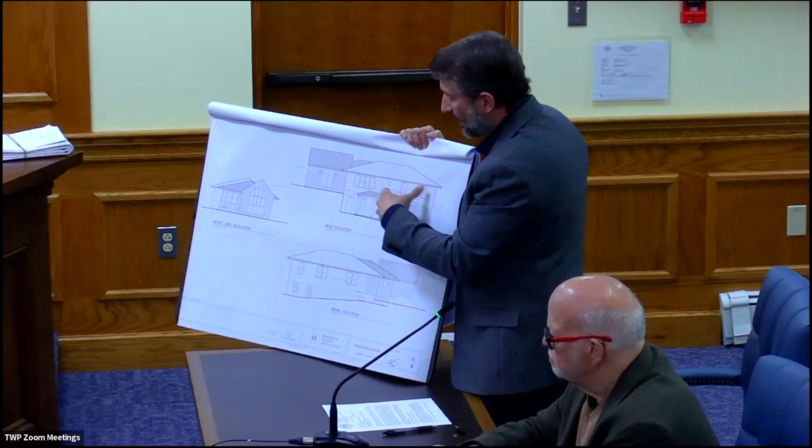There's a proposed door opening where a window was, and then this entry porch runs with the style and character of the house, with the hipped roof and materials - either standing seam or copper metal roof - and columns that are detailed and consistent with the character and age of the house. So it looks like an original portion of the house as opposed to something added onto it.

And then the proposed addition, when you're looking from, let's call it the front, it doesn't really present as a front, and you can't see it from the street because of how high it is above Route 24, and it's also concealed within trees - it's heavily wooded along that area.

So we have the front, which somewhat appears like the back, and then the existing porch element, which is being infilled - the first portion of the addition, which is the office. And then we've created a piece here with a slightly differing roofline to look a bit more like an accessory structure, not wanting to change the scale of the building. We're trying to create something consistent with that smaller scale and lower roof lines. So we gave this its own separate roofline piece, but the same shingled, painted shingle material, asphalt roofing shingles, consistent with and blending into the character of the existing house.

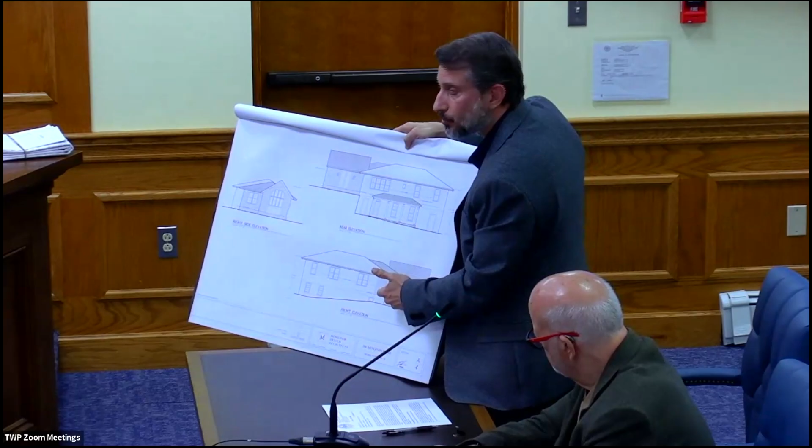Okay, thank you. There's a series of photographs in your packet - could you go over those and explain them to us?

And I'm not going to mark these since they're part of the package. Right, okay.

The first image is essentially the front side of the house. As the grade comes up, it's really kind of a single story appearance of house, and this level of ground sits well over a story above Route 24 down below.

The second image is stepping further back, so you see that whole front face of the house as well as the left side. That left side is currently where the grade drops down, and you see some carriage house doors there. This is an old carriage house, and that is the garage entrance to the house. There are no proposed changes anywhere along this front left corner or along the left side of the house.

The third image is a head-on, full-on view of that left side with the carriage doors going into the garage down below.

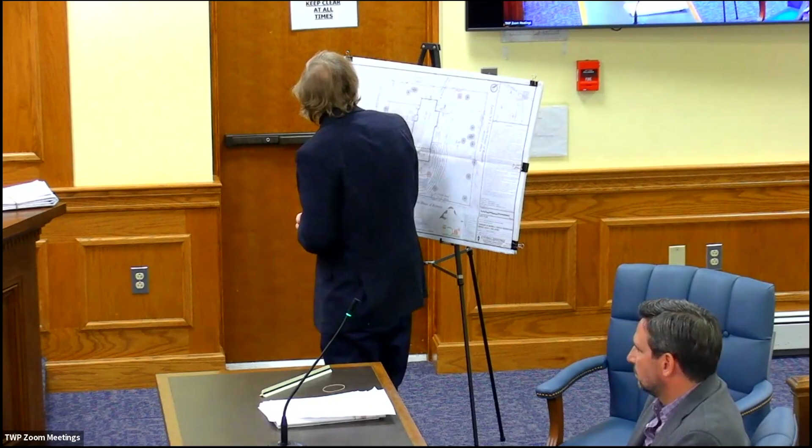The height of the building will conform where 35 feet is permitted; we're at 33 and a half. With impervious coverage allowed at 35%, we're at 21.71%. Building coverage at 15%, we're at 12.05%, even though the lot technically is undersized in this zone - 35,000 square feet is required. The pre-existing condition, we're at 26,450 square feet. We are asking for 3 variances as enumerated on the agenda.

The pre-existing side yard variance, on the western side of the property, will not change. It exists at 18.96 feet, and that will remain. Combined variance, side yard north, east and west - 75 feet is required. We'll have 66.67 feet with the addition of the garage on the easterly side. And there's a pre-existing front yard setback where 75 feet is required. The existing house is at 52.81 feet, and that will not change.

I should mention the property is surrounded by the lands of Loyola House of Retreats, both on the easterly side and on the northerly side as well. My feeling is that these variances could be granted, being that it is mostly open space to the north and to the east.

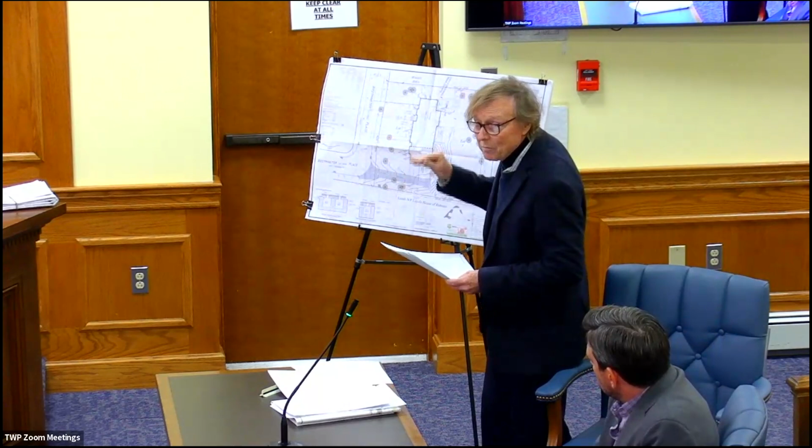We do have a slight increase in drainage. Let me say briefly that the increase is small because presently the lot slopes from the street towards the rear, dropping about 18 feet from south to north. Presently the driveway is on the easterly side and it wraps around the rear of the house and garages below. With this addition and garage placed on the side, the garage will be about half a story below the first floor, which will be much more accessible for future residents. The driveway that wrapped around will be removed, so there's less lot coverage there, though we're adding some lot coverage on the side to access the new garage. All in all, the increase is rather slight in runoff.

24 cubic feet on the 10-minute, 25-year storm, and 72 cubic feet on the 60-minute, 25-year storm. We've addressed that with the addition of 2 dry wells in the rear of the house to capture runoff from the roof, and we've also added a dry well at the base of the driveway to capture runoff coming down towards the back of the property. We have a total capacity of 635 cubic feet for the seepage pits for the home and 317 cubic feet for the seepage pit for the driveway. They will more than cover any increase in runoff - as I said, it's only about 72 cubic feet increase - so we've more than captured that with the installation of these dry wells.

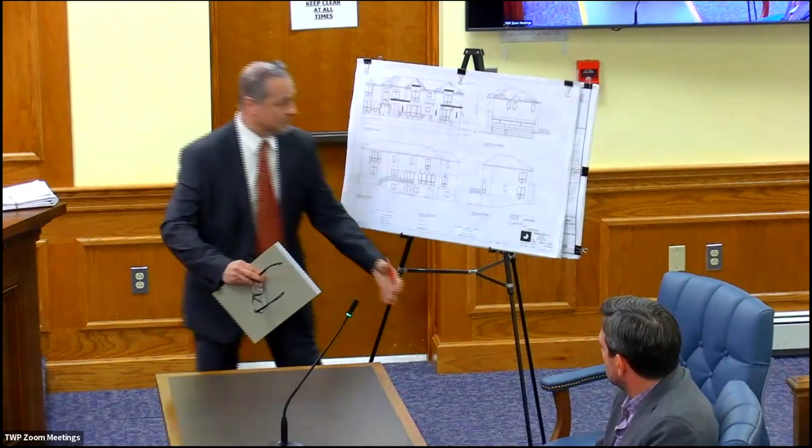The existing property at 9 Westminster is unique in several ways. It's currently a ranch, one story, with a screened-in porch on the right side, and the property is pretty much flat in front. It drops to the side, to the right, and in the back. The garages are accessed by a driveway that goes from Westminster around the property and into the back underneath the screened-in porch and the existing basement.

Our proposal is to remove the roof and remove that screened-in porch. It's really a ranch that's in need of repair. So the main principal structure we want to keep, and we want to expand up and out.

Besides the uniqueness of the property, it's surrounded by one single-family house to the left, and to the rear and right side it's the temple and I think the Loyola Retreat Center. So it's open space, other than the single-family house to the left, where our engineer said the existing side yard is 18.96. There's a buffer between our property that we want to keep, except that it will be cleaned up with this proposal. So that was our first variance that we're asking for.

The existing left wall from the ranch to the property is 18.96.

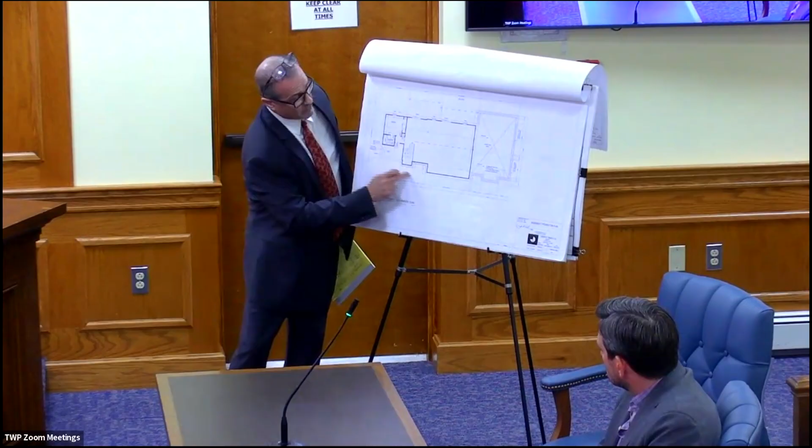The other variance that we're asking for is the front yard setback, which is existing. I believe that number was 55.43. Our proposal will not increase that at all. In fact, any additions we do, especially to the garage, we're going to set back 3.5 feet, so that 55.43 still stays as a non-conforming setback.

Then the other variance we're asking for is the total side yards. Again, this is a non-conforming width of property, so where 75 feet is required for the total side, we're at 66.67. That's because we left the right side of the structure, removed the open porch, and added a 3-car side load garage, and that's what kind of triggered the total side yards. That's the third variance.

However, we felt that, again, because of the shape of the road and because this is located in open space, it really has zero effect on any neighbors or anyone in the public. So basically an open space—we are proposing a set of stairs to an open space with a bedroom, a bathroom, and a utility room. This is currently a walkout basement and will remain a walkout basement.

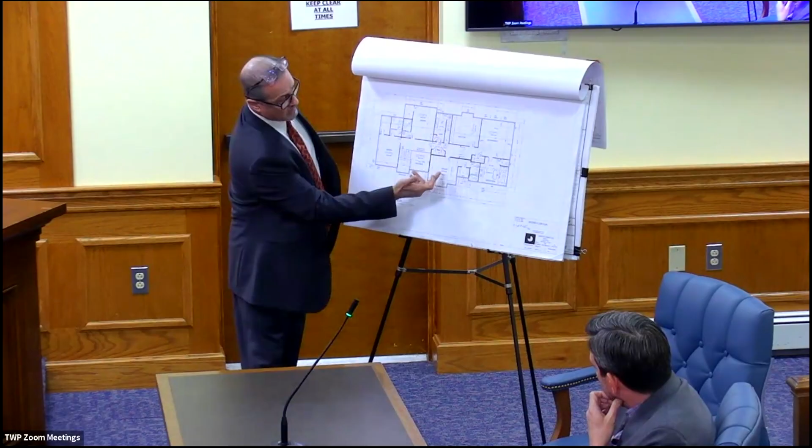We continue down to a hallway. We have a laundry room, another bedroom with a closet and a bathroom. And then we have the entire master suite, which is a walk-in closet, master bedroom, and master bath. So all in all, on this floor, it's 4 bedrooms. We have a bedroom in the basement, so it would be a 5-bedroom house.

I'll move on to sheet A1, which is the views of the house. So we got the front elevation. Again, we're adding a second floor to the existing structure and the addition of the garage to the right side. We proposed a stucco house with flat windows, kind of more of a modern feel to it.

And I just want to say, when we worked on these plans with Mr. David, we realized that we're asking for a variance, especially on the left side. This is where the minimal effect is as far as the addition. We didn't go out on this side of the house. We also dropped the roof down lower, so we have less of an effect on the neighbor to the left of us.

As far as the 2-story structure, we meet the height. From the average grade, we're at 33.55 feet, where 35 feet is required. So we felt that this fits within the guidelines of the zoning ordinance, even though we're asking for 3 variances. Again, one side yard, total side yards, and the front yard.

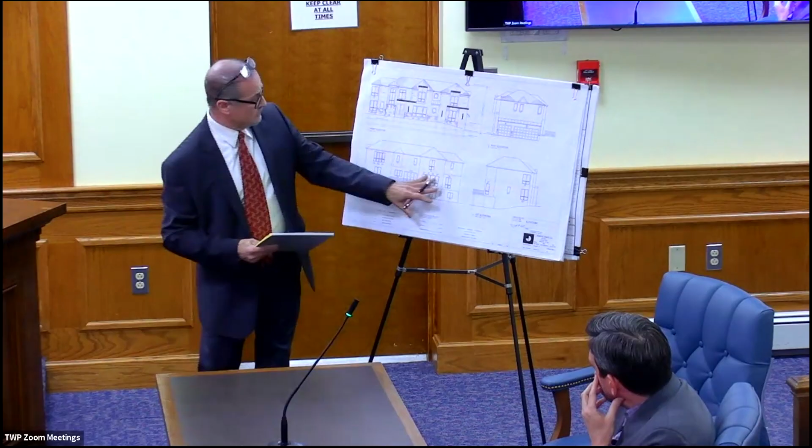So you got the elevation to the rear. Again, it'll be stucco, that's a walkout basement with windows looking out to the backyard. With this proposal, we'll have more open space in the rear yard where the only neighbor, even though it's buffered, originally stored cars and driveway in the backyard. We're going to eliminate that, and we'll have the cars all the way toward the open space on the right.

So that would be it. Again, we're asking for 3 variances, 2 of which are existing, and we're not making that any worse.

Do you also have to apply to the town of Morristown on this? I don't think we do. Well, we applied for our notice, but when I called and asked about any variances, they said no, we were dealing specifically here. So you don't have to go to the Morristown Board to get any approval? No. I think before the town issues a permit, we'll need a letter from Morristown confirming that, because otherwise I would think you have to do that. Oh, really? Yeah.

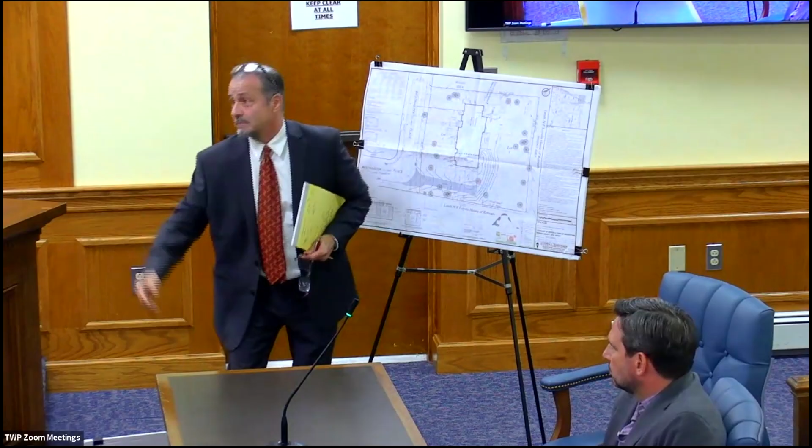Do you know what their zone is on the other side of the line? I'm sorry, do you know what their setbacks are on the other side of the line? I don't, because when they told us they don't really have anything to review, we kind of just came straight here.

Did you submit the plans to Morristown or just call them? I called them personally and they said they don't... I'm just wondering if they'd seen the plans, they might have answered differently because they didn't know exactly where you were putting things. We could send it to them, right?

I thought the same thing, I thought we'd have to go to both planning boards, just because the majority of the property is there. Right, the majority of where the improvement is gonna be. Correct. We could call them and submit a plan and see what they say. It's gonna be we just need a condition upon a letter. They just need to know that, okay? Absolutely, yes.

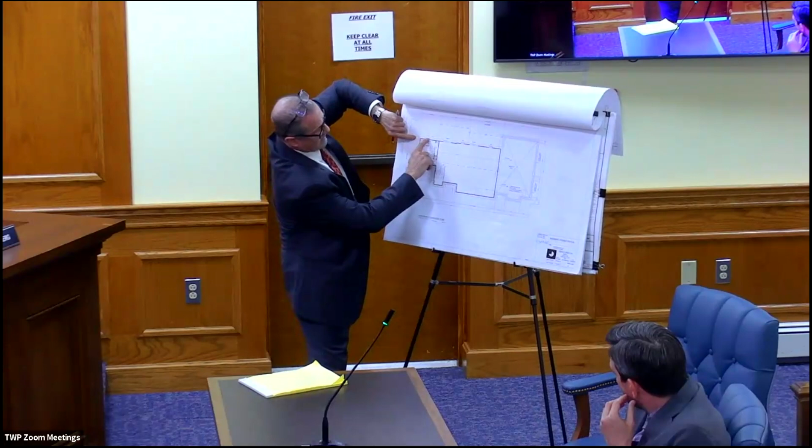Okay, board members, any questions? Just quick clarification, because it looks to me like the existing rear wall comes from where the bedroom is proposed in the basement, straight over. So this is the corner of the existing basement. Right, it's straight over. We do have overhangs in the back holding up the structure.

So they start about 30 over. For the addition, the first floor will have a separate exterior wall that will run parallel to this wall. Correct. So this is the first floor, this is the corner of the existing. If I follow the existing, it's there, but we extended the kitchen and family room further back, about 5 feet further back. So you'll cantilever over the existing wall? Over with supports, yes.

And again, this extension meets the side yard and total side yard. So really, the biggest difference in the volume of the house is the height. You're not going back very far. Correct, you have the garage and nothing on the left side. For the garage, even though we're out 24 feet, there's a 10-foot sunroom that has a garage under it. We're taking that out, so we're another 14 feet to the right. All right, thank you.

But even when you're extending that out, it's just the combined side yard you need the variance for, not the single side for that part of the house. Correct, because you're at 49, what's 30 is your minimum? The side yard, yes, 30 is required. We're just under 19 on the other side, you're at 49.42, where 30 is required. Correct. So we do have the 30, but we don't have the combined of 75. And also we're a non-conforming width lot.

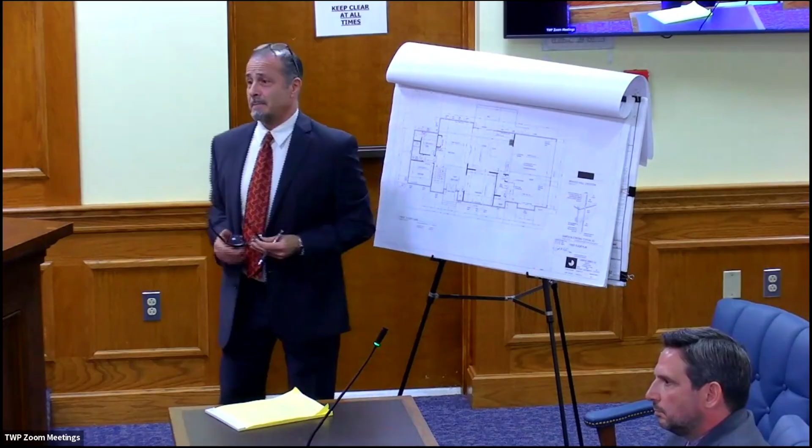Any other questions from board members? Any members of the public with any questions of this witness? Seeing none, hearing none, close the public portion.

Any further comments? No, I think our proposal really has no negative impact to any public. We're keeping the addition to the left as modest as possible. We are going to keep buffers, we're going to clean it up, the property gets cleaned up. I think it's a positive for the street and the streetscape.

Your real problem started with the house being so close to the other side yard. Other side and front also. Right, so that triggered all these variances. Correct. So I would be in favor of this, especially given the fact that we have Loyola and the temple being your neighbors, and there's no plans to develop anywhere near that. And they're so far away. Right, and there's so much buffering. I'd also make it conditioned on a letter or approval from Morristown.

Any other comments? If not, I'll entertain a... I think my contractor is trying to say that we're going to need a letter from Morristown. That's fine, you're just gonna have to get it. We're just gonna have to get it.

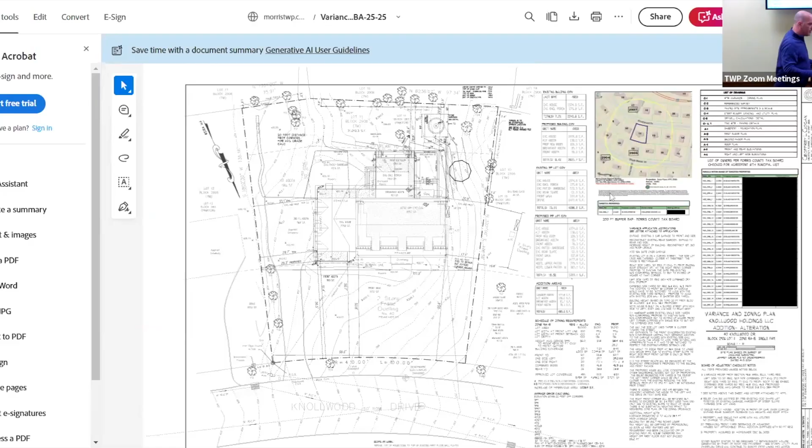Hello, Brian Mileo, 16 Canterbury Way. Would you spell your last name, please? M-I-L-E-O. Just a question for the owner - you mentioned you're moving out of Livingston because your house is too small? No, it's too big. Can you tell us the square footage of your home in Livingston? Close to 5,000 square feet. And will the architect reveal the square footage of the new house being renovated? When we talk to the architect.

Good evening, members of the board. Timothy Dixon at 14 Kissel Lane. You mentioned that your children are older and recently were married. My daughter got married. Who else would be living in the house with you? Just my wife and I. Thank you.

My name is Frank Zupa. I live at 23 Canterbury Way, a couple of blocks away from this house. And you said you needed more space. No, I said I wanted a spacious feeling house with higher ceilings. But the house you're proposing has in excess of 5,000 square feet. No it doesn't, I've looked at the plans. Your architect can answer that question when the time comes.

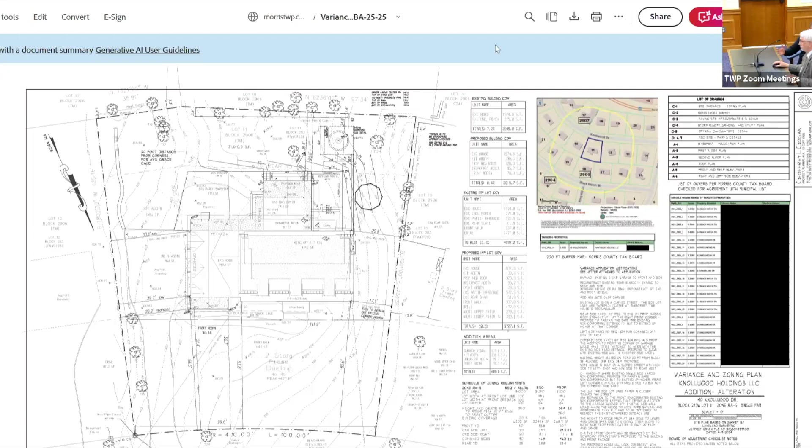But with regard to why do you need 4 bedrooms with locks and separate bathrooms? That has nothing to do with what you said. Well, when my family comes and stays with me, I like them to be comfortable. Each one should have their own bathroom and a locked door. What's wrong with that? It's about comfort and privacy. And the second kitchen is called the baker's kitchen? Well, I'm an amateur baker. One of my hobbies is I like to bake sourdough bread for my friends and family - I give it away.

Well, I'll reserve the other questions for your other testimony. Thank you. Any other members of the public with questions for the applicant? Hearing none, seeing none, close the public portion.

We introduce the architect for the proposed renovation of the house, Mr. Jeffrey Gogan. Thank you. I feel a little out of place sitting down, but I hope that's okay. I'm going to look at my screen, which should exactly agree with what's on the large display. Before we do that, can we go over credentials for the board please? Yes.

Jeffrey Gogan, architect, at 35 Pine Street in Morristown. I've been in Morristown working as an architect and planner since 1984. I graduated NJIT in 1978, became licensed in 1983, and I've been testifying before many boards in this area and North Jersey, including this board, for many years.

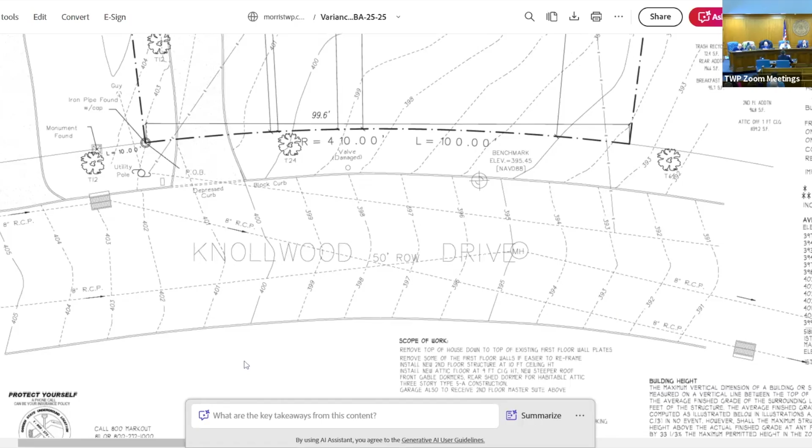Joe, let me ask you - I'm not sure if you had a chance to look at the square footage of the lot itself? Yes, I was trying to pull up the deed. I was able to find tax records through njpropertyfacts.com, a search of last year's tax records that shows the land description at 0.362 acres, which would be just under 16,000 square feet in size.

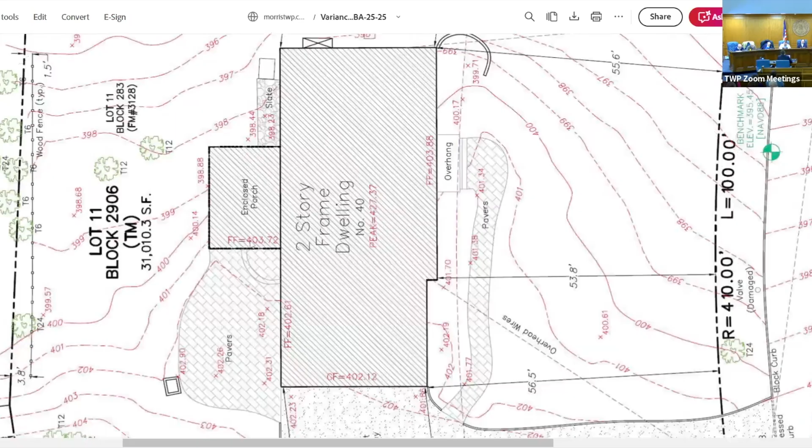It appears there's likely a typo on the Lakeland survey, sheet 2 of the set, that indicates 31,000 square feet for the lot, block 2906, lot 11. It's roughly 130 by 135 in dimensions. So what's shown on the zoning map would appear to be incorrect, because it's based off a survey carrying, I believe, a typo on the plan. I'm looking to pull the deed booking page to see the description in title, to see if that gives a square footage. I'll do that and follow back.

Okay, so we're going to come back to that thought, because it impacts other things like coverage, right?

This is the first I've heard of that. It's interesting, but I did rely on that survey. I wasn't aware there might be a mistake on it, and I was just looking to see if maybe I picked the area of the lot myself, but I'm not seeing it. No, it says 31,000 on the survey. Yeah, so I think I relied on that.

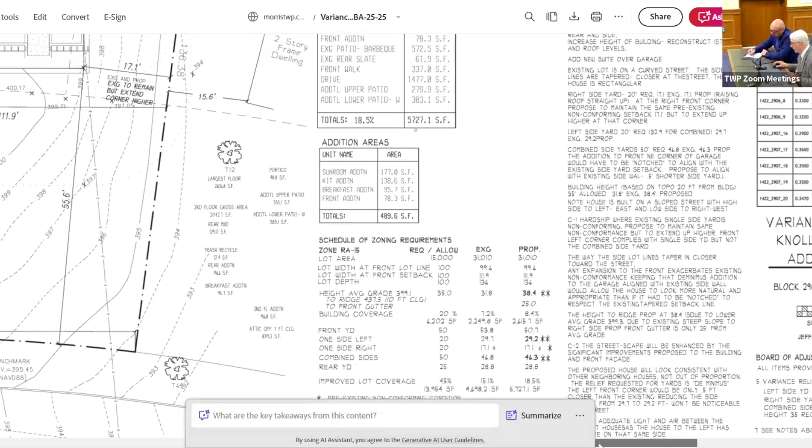Okay, so should I keep going here? Yeah, we'll come back to that issue, I think. I'll have it in a second. Yeah, go ahead.

Okay, so on the cover sheet I have my coverage calculations, and below that the schedule of zoning requirements, where I highlighted the height of 38.4, where 35 is permitted, and the one side on the left at 29.2, where we have 29.7, but 20 is required for a single side yard. But more was required because of the shortage on the right side for the combined side yard, so for combined sides it's required to have 50. Typically for a house, if you have 20 on one side, you'd have to have 30 on the other side. We are at 46.8 right now, and we will be at 46.3 feet.

Okay, so those are the variances. Let me back up here, and I'm just going to skip over, this is the survey Joseph was just talking about, and that's the area he was referring to on the surveyor, which we do rely on.

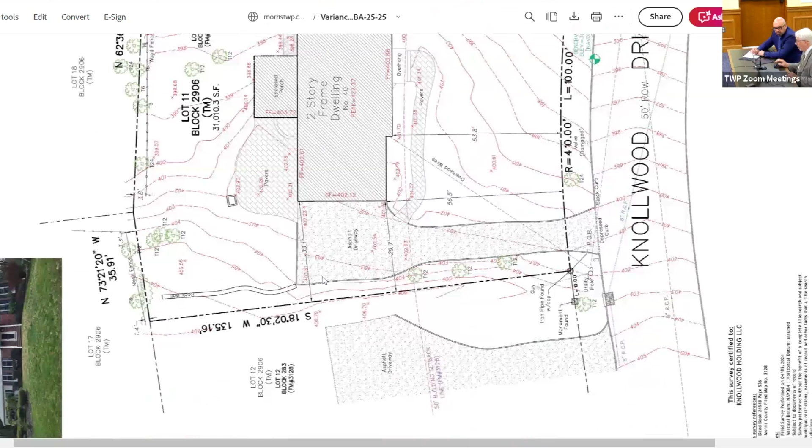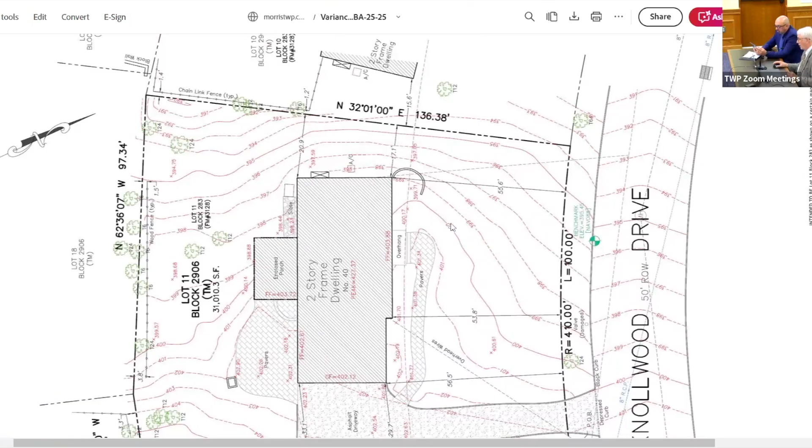You can see on the survey, and I have it on my site plan too, that the slope is quite severe with the topographic lines. There's a hill going down in this direction, and when we calculated the height of the building, we had to measure the topography all the way over in this area off of our site because it's 20 feet from the footprint of the house. That brought our average grade lower and is one of the reasons we triggered a variance.

These sheets I'm going to scroll through are for the paving and hardscape plan, which really just include a stormwater system, which I'll talk about. We are proposing a good-sized dry well to pick up more than the required amount of water from the runoff coming off the roof.

This will all be reviewed by the township engineer as part of the process as soon as the variance is complete, but they have this already ready to be reviewed. Essentially, it's just keeping most of the existing grading with a few changes in the rear around the rear addition.

The next sheet is really more about the storm runoff. It shows the proposed perimeter drains leading from the roof leaders over to the dry well, and they'll review all of that, of course.

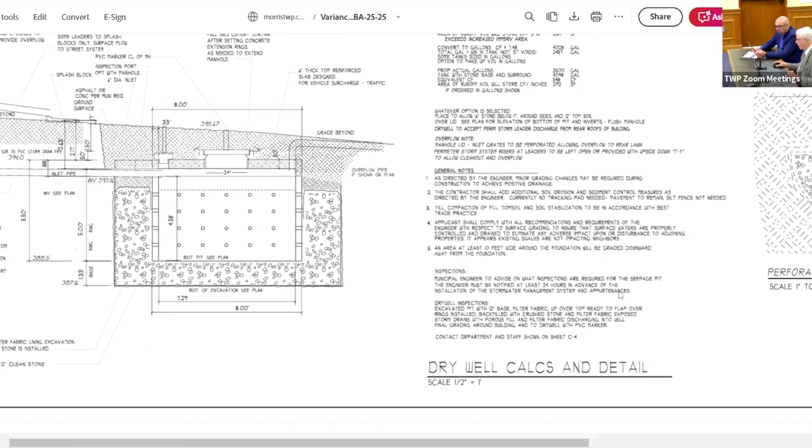Then there are some dry well details and calculations for the volume, and some more details of the site, including any pavers or patio work, some plantings, and some trenching.

Also, this is the first architectural plan, the basement or foundation plan. So I'll just back out here again.

So the existing basement is this rectangle right here. It has a little recreation room, a little closet area, a rear unfinished area with mechanical equipment, and some basement windows. The left side of the drawing is all slab on grade where the garage is.

This rear portion here, if you can see, let me zoom in a little bit. This dotted line I'm pointing to is where there's an existing sunroom, we called it, built over a deck. It was built on top of a deck, which is not ideal, obviously. It only had 3 sonotubes under it.

So we decided to rebuild it, and while we were doing that, we decided to expand it a little bit to the right and to the rear to create a nicer, more usable family room. But it was all respecting all the setbacks.

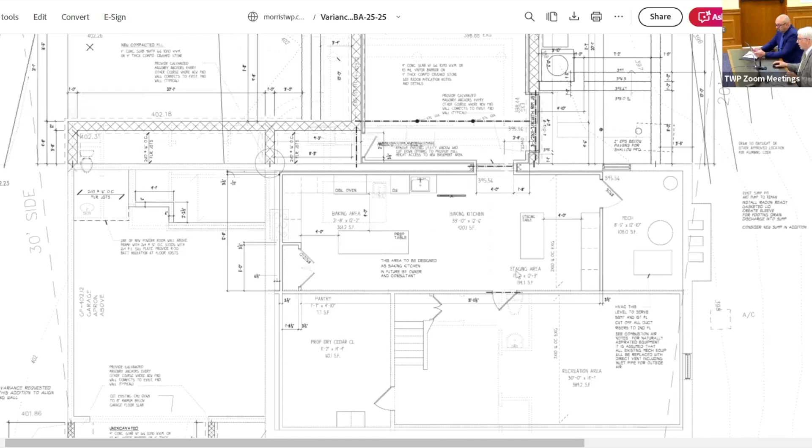The ceiling height is quite low in this basement, so we are also proposing to step down into this larger room, which will become a more functional, useful room with a better, more normal ceiling height, probably closer to 8 feet, still a little under 8 feet.

There's a walkout sliding door proposed right here to a lower patio, which will then step up a little bit and have a little area for barbecuing or a smoker, some outdoor barbecue type equipment.

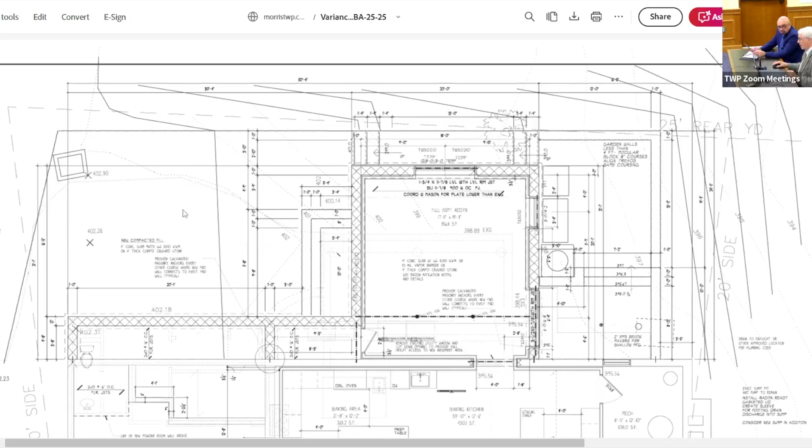Then the patio will step up along the back of the addition to an existing patio, which is in the upper left side of the drawing. That is being expanded very slightly just to align with this walkway. This is the line proposed for the patio right here.

You can see some of the regrading, just filling a little bit here and creating a very low retaining wall here to cut into there to allow this walkout basement. So right now it's not a walkout.

I'll go down to the first floor. Back out of here a second again, and here you can see the front bump out with the pedestrian door and a little bit of area for bins for recycling and such. There's an existing portico on the front of the house, which is going to remain.

We're just going to redo the columns and the detailing of it. And then here are the 2 garages. They're staying. We're proposing this mudroom on the back with a toilet and sink, a little powder room, some closets and a pantry, and a little area with a back door and a door from the garage. Then you walk through a hallway over to the kitchen, which is kind of an open breakfast room, kitchen area.

And then there's a door to this back family area. We still have this existing family room with a fireplace, pretty much as it is. The dining room is still there as it is, and the living room is there, but we're making it a little smaller to be able to add a front powder room and a hall closet.

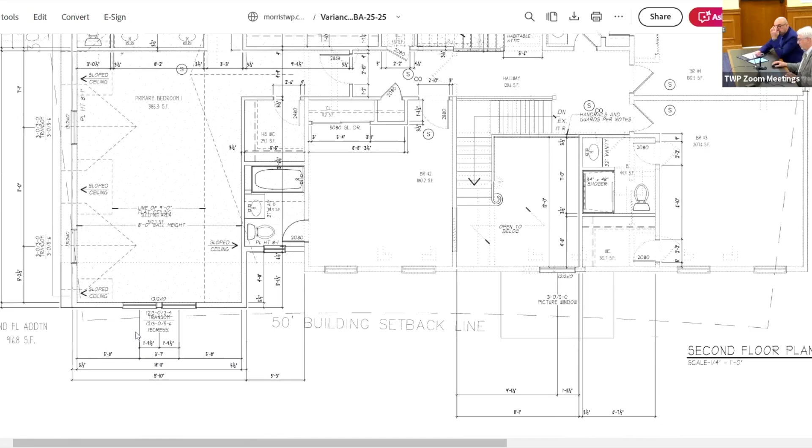So this whole section here is a new bump out over the garage, this whole section. And it goes over the bump out on the front, and it goes over the bump out on the back.

So basically it has a couple of walk-in closets and a decent master bath with 2 lavatories, a private toilet, a tub and a shower, and then a sleeping room. There's another little bathroom off of this bedroom.

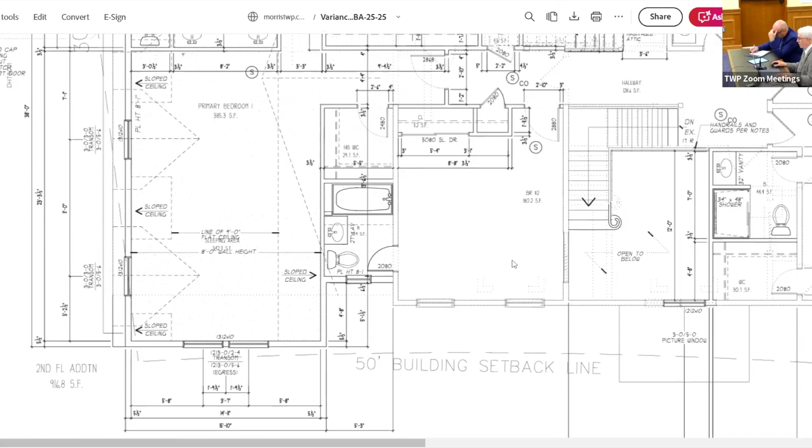In this hallway, normally you might see a pull-down stair to the attic. But we decided to try to make the most of the attic with what we call a habitable attic, which means we raise the pitch of the roof and put a compliant everyday stair, not a pull-down stair, up to the attic. So I'm going to scroll down to the attic plan.

So you can walk up that stair to kind of like a bonus room where the grandkids could crash if they're visiting. It is a legal sleeping area if somebody wanted to sleep up there, although it isn't a bedroom. Right now we don't even have a door to it. We could put a door at the bottom of the stairs, but we have an egress window. We have dormers in the front.

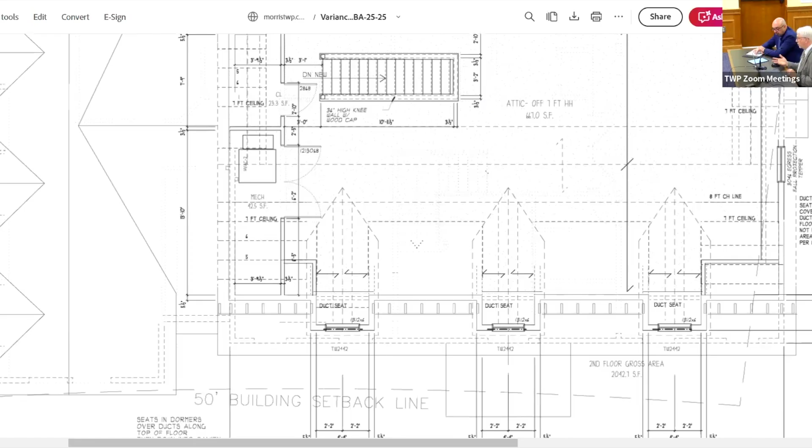So we wanted to raise the pitch to get, I'll show you the elevation, a more traditional, steeper roof over the dormers. And we're going to put a new HVAC system up there for the second floor and the attic. But basically, you come up the stair and there's just an open dormitory feeling for an office or for people who need to work at home.

And need a quiet area where the kids and the pets aren't running around. I'm sure everybody after COVID has experienced that problem when you want a little bit of extra elbow room, a little private area where you can either have an office or a play area, or another little section for whatever.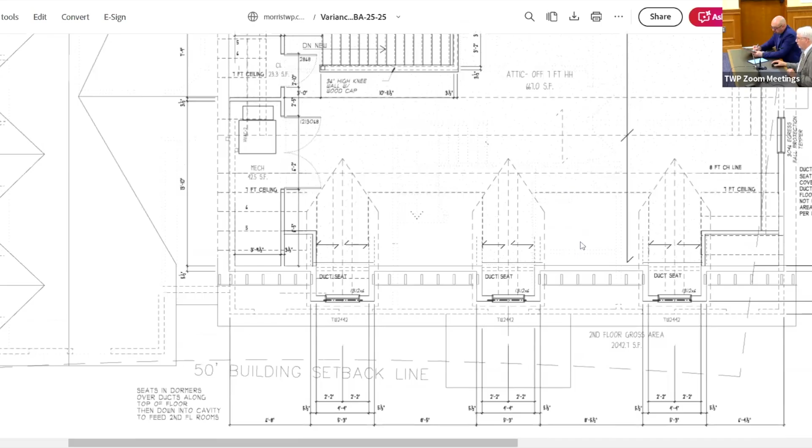So that's called a habitable attic. It's limited by the square footage of the second floor. The rule is that any area with more than 7 feet of headroom can't exceed 33% of the second floor area. That's a code issue, and one way to think of it is like a mezzanine of the second floor. It's technically considered part of the second floor under the International Residential Code, but it is an upper level of the second floor. It's called a habitable attic.

So now I'll just look at the elevations. I have to.

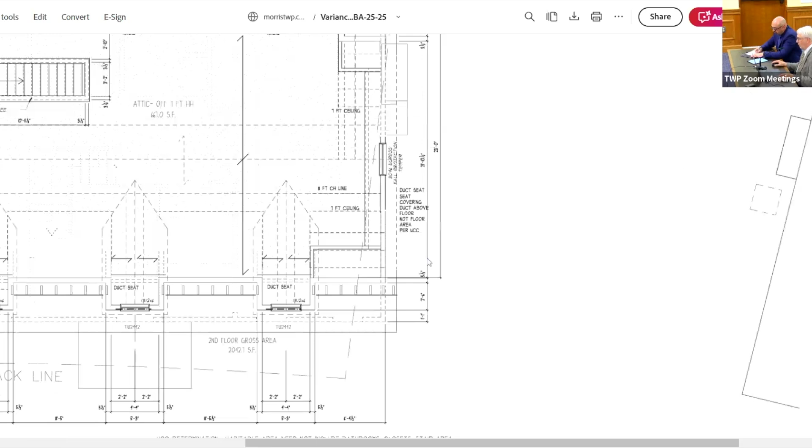So before you jump off the attic, what's the ceiling height again in the attic? Let me see if I can show you.

The area that you count for that 33% rule is any area that's 7 feet or higher. So you see this dashed line right here goes around like this - this is the 7-foot line. It follows the dormer around because it's partially in the dormer.

It's really hard to see your cursor, but is that the one that's kind of in the middle up there? Yeah, for example, right there, you see that 7-foot ceiling? That dashed line can be used all the way around, you'll see that's where the 7-foot line is. I'll just go slow here and you can see it.

So basically you see the same 7-foot ceiling line right here. These parts are sloped. You've probably seen these attics with dormers, where you have a sloped ceiling going down next to the dormer, and that's what you'd see here, as well as on the backside.

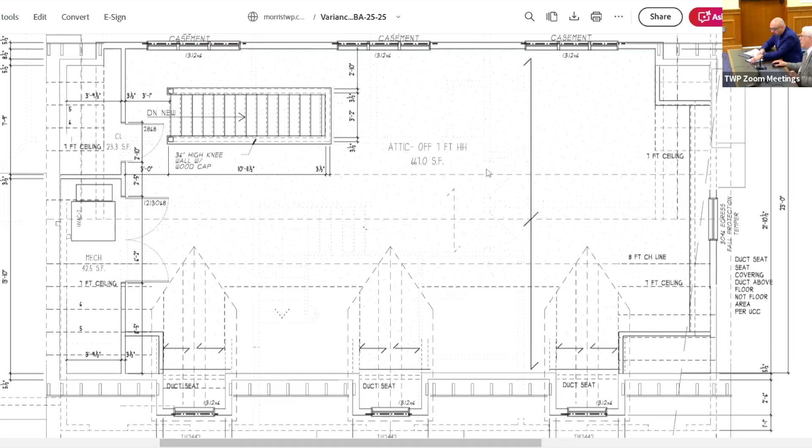And part of it, this rear area, is a shed dormer facing the rear yard, and that does have a 7-foot ceiling.

Okay, the front elevation.

Actually, I think I'll go to the left side first, because here you can see where the existing roof is. This dashed line, if you can see my cursor, is where the existing roof line is. And so the proposed main roof, which is beyond this garage roof, is this line here that goes up, and then you see it appear up here.

So that's the main triangle of the roof over that dormer, over that attic I just talked about. This is the rear shed dormer over that attic, and these are the front gable dormers in front of the attic. And then we have 3 similar dormers along the left side for the master suite with a cathedral ceiling, the 2 existing garage doors, and the pedestrian door we're proposing.

So again, this is all an addition right here, this whole portion in front of the existing garages. And then this is that 4-foot 8-inch addition in the rear, this whole section. And then this is the sunroom beyond - again, that was just to here before, and this was the roof, the top of the roof.

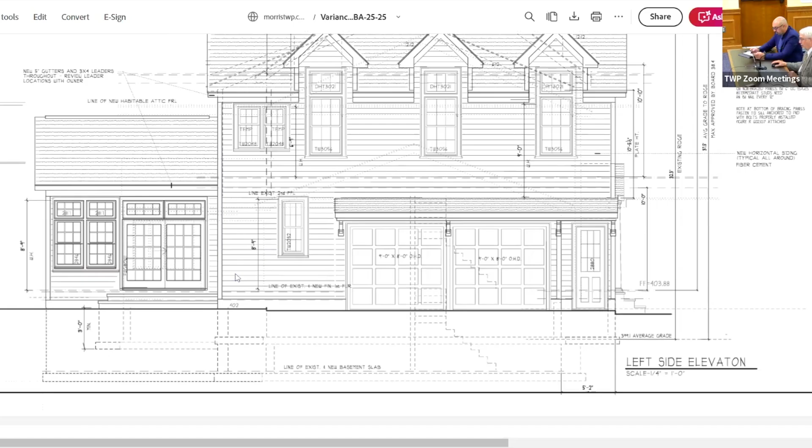So it's gotten larger in both directions and the roof got steeper. So now I'll go back to the front.

You can see here, basically the window pattern is the same, although these are taller windows because they're proposing to raise this second floor up to the 10-foot ceiling and the 9-foot ceiling on the second floor. So all the windows are nicer, taller, more traditional with transoms.

The same thing with the portico, taller, slender columns with a new roof over it. That's the existing chimney on the right that you see beyond in that family room area in the back right corner. And then these are the 3 dormers in the front with the steeper roof, which wouldn't be possible if the roof was kept at a lower level.

And then we have this similar gable over the garage with a connecting roof here, and these are those dormers on the side, the left side. So those 3 dormers at the uppermost level, that's serving the attic? Yes. Did you consider just reducing the height of the attic so that you could comply with the height requirement?

We were close to that before, but really what drives it is pushing the second floor up 2 feet. Right now it's at an 8-foot ceiling, becoming a 10-foot ceiling, and another foot for the second floor. So that's 3 feet higher that the attic floor would have to go up to get those 2 floors where they were hoping to get them.

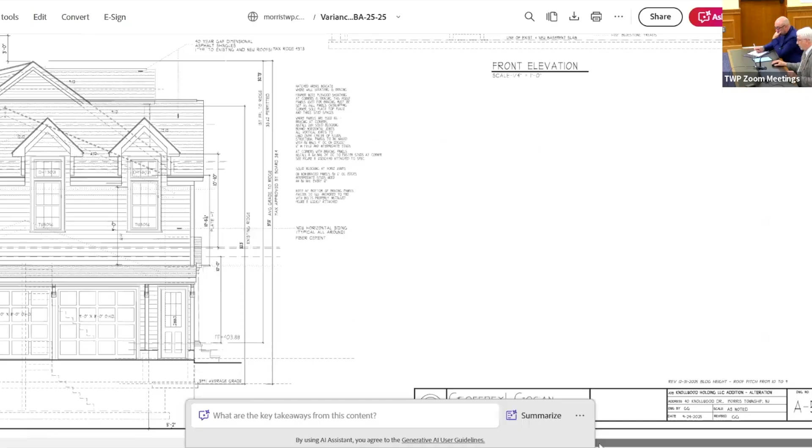I'm sorry, let me get back over here. Could you explain the 9 and 12 for those — what you mean by a 12 roof or a 9 roof?

Yes, if I can gesture, a 45-degree angle would be 12 feet horizontally and 12 feet vertically, so that would be a 12-on-12 roof. But if you drop it down to a 9-on-12, it's only 9 feet vertically to 12 feet horizontally. So it's like a right triangle. That's how we call it, a 9-pitch or 8-pitch or 7-pitch, and it drops like that. Thank you.

So I just go back to this existing pattern here, and you can see vaguely right here where the gutter line is, where the soffit is right now, right there. So that soffit has to go up 3 feet, and then if we did that and tried to comply with 35, it would be a very low pitch roof.

So really the right thing to do is to raise the pitch of the roof and raise the whole roof up. It'd be a low-pitch roof if you wanted to maintain the 7-foot attic, right?

Well, the 7-foot — I'll just see if I have it drawn here. Yeah, you see this dashed line right here, that's the 7-foot line right there. So even if we drop this ridge down, let's say it would come down to just a little under 7 feet, and you wouldn't have any flat ceiling at 7 feet. The ridge itself would be at 7 feet or less.

Right, actually I'm having trouble scrolling here for some reason. Oh maybe Ryan split the exhibits. I had them all rolled up, but I think he made them separate, right Ryan? I have to go in and find that other exhibit. I had another exhibit where I showed the neighborhood topography and some photos, but I believe they were posted separately, and I could try to find that in just a second. I'm sorry, I didn't realize they were separated.

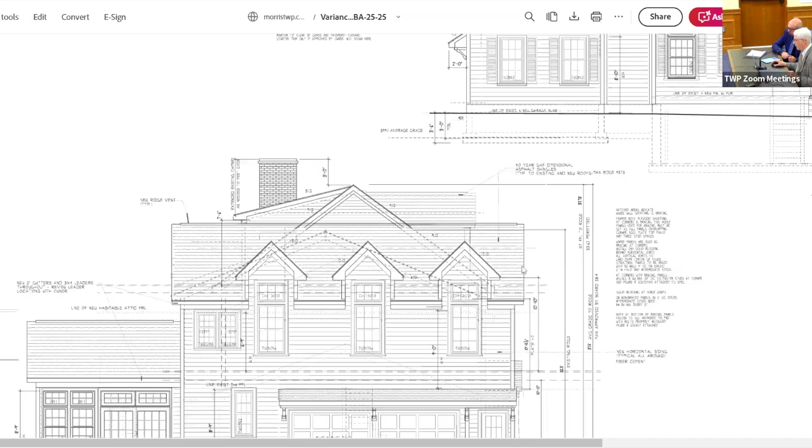Let me explain it from the standpoint of the front elevation, where I think you can see that the slope of the property starts up quite, let's say 3 or 4 feet higher on the left side. It comes down the hill, across the driveway, and then across the house, and then down another few feet down to here, and then it continues downhill. So we actually had to start the 20-foot topography measurement around the perimeter of the house all the way out here. I'll go back to the site plan where I have it.

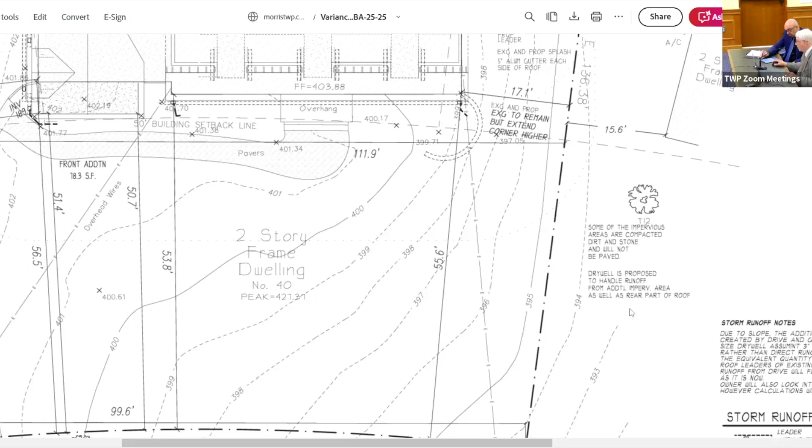I'll try to log on to that exhibit with the topography. But you can see here how it is quite a steep slope. The entire road kind of slopes down in that area. So you have the high side of the house, way up here, at 404 feet above sea level. And then the low area where we had to measure to was closer to 394, so it's about a 10-foot drop from one side to the other. And that forced our average grade down.

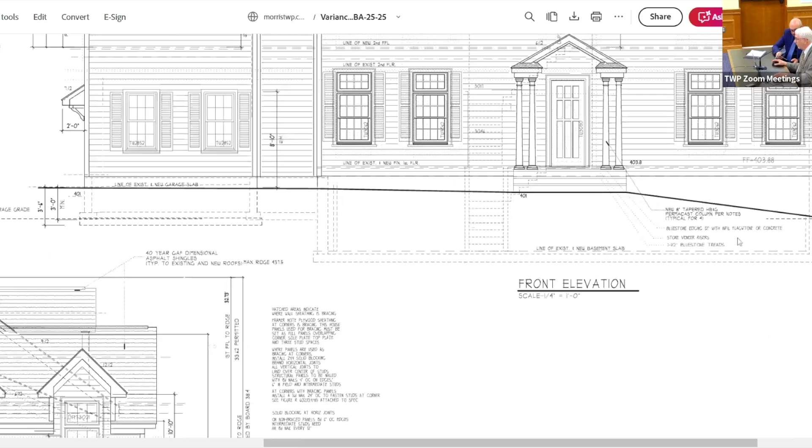I'm going to show you that again on the front elevation. Perhaps just pull up that front elevation and let's walk through your average grade calc real quick. Or sorry, not the front elevation, the site plan layout. So that brought our average grade all the way down to under 399.1. Just pull back your site plan so we can discuss how we get to that change in average grade. You want to see the whole front elevation? To the site plan layout. Oh, the site plan, okay.

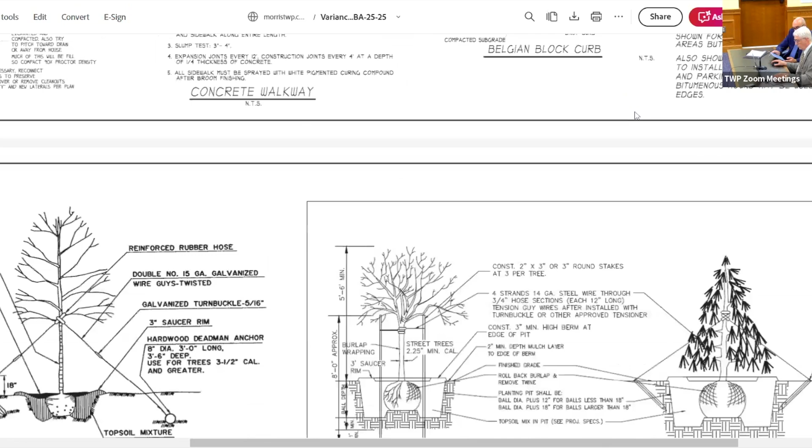So the existing home has an outer footprint of the foundation, and then our grade calculation is done 20 feet off to the outside. So the average grade calculation, if the property isn't modified, only changes in the locations where the foundation is relocated by additions, right? So the change in your average grade comes from the additions to the side and to the rear of the home that put the 20-foot buffer outward further in either direction.

So on the side of the driveway, things remain relatively consistent with the addition above. And then to the rear is where the foundation line moves out significantly towards the rear of the property, which is generally sloping to the west. So it's that western corner of the property where we see that regrading happening around the side of the building to try to pull the grade back up, because we're going into a lower portion with the footprint of the foundation.

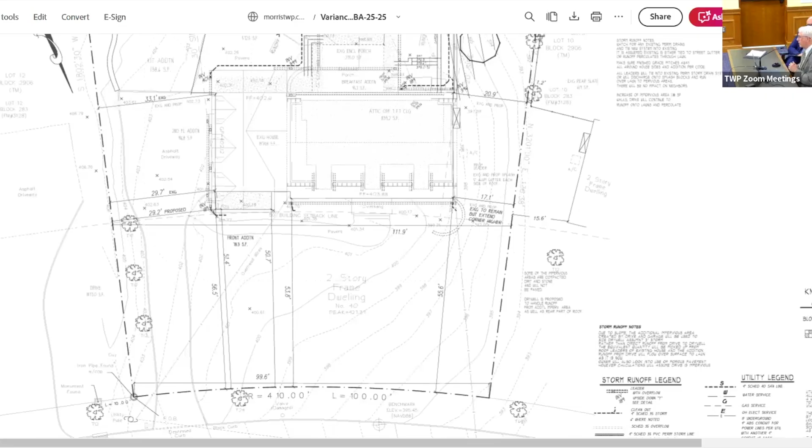I really think it's a case of, that's why we have variances, to see when something is appropriate and it's not going to look too out of scale. I don't believe it will, because there are a lot of houses built with these types of ceiling heights and steeper roofs, and it looks very nice. It's not a monstrosity.

Can I ask a question? Maybe I can focus this a little bit. Is what you're telling us that if you were in the same current footprint but at the proposed height, you would be compliant? That you're going to a datum that's lower because of the expansion back? Is that what I'm hearing? Correct, that's partially right. The addition to the rear is going into land that's lower.

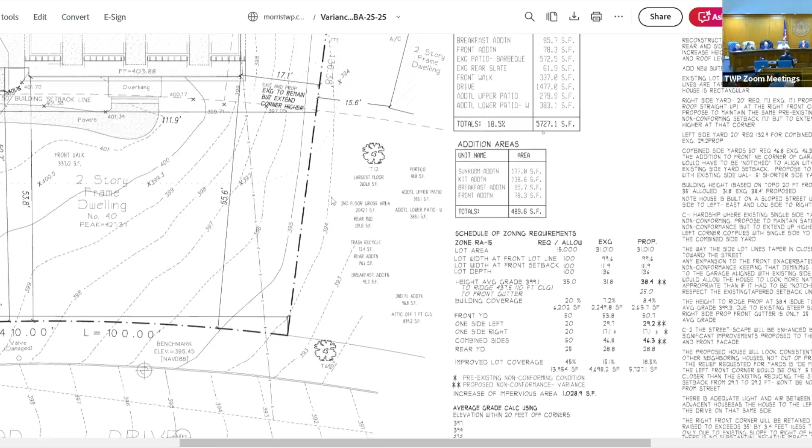So then that's driving that number up. So what would the number be? I'm not suggesting you don't do the expansion backward, but what would be the number on the current footprint to your proposed height, without the 20-foot rule, is that what you mean?

On the plan it's listed as 31.8. That's the existing. I know what you're asking, but yeah, this is going to be higher because I saw the shadow. How much higher is it? Architecturally, how much higher are you going from the existing roof peak at 31.8? I think that's a question a lot of people will have, and I think that's the way to look at it.

So if we know the existing height calculates at 31.8 feet, how high architecturally from that existing ridge is the proposed ridge? That difference is the difference of perceived height to the application, which I think is probably going to be important to a lot of us here. I think you could derive that from the elevation view.

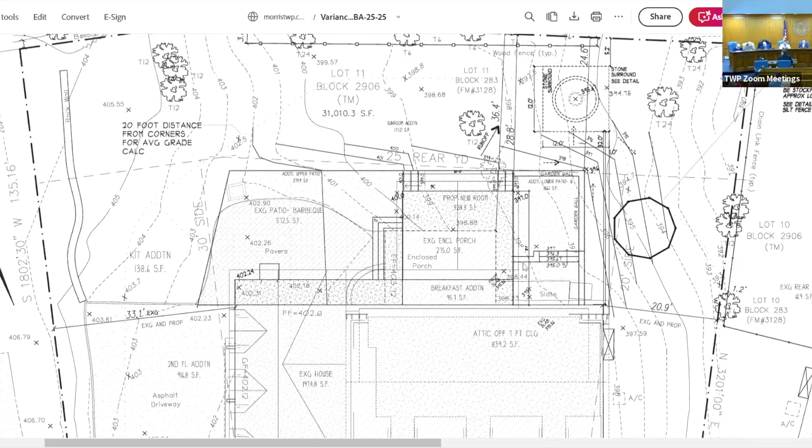I'm asking for help from the experts here. Can we derive that now? I meant for them to extract it from their plan and testify it to you on direct. Mr. Goldberg, you understand why I'm asking this question? Correct, yeah, okay, I'll try to address it. I know what you're asking.

Like if we didn't expand that rear family room and that rear left corner and have to measure further out, the 20-foot line went further out, enlarging the difference between the lowest and highest point essentially — what would it be? That's basically what you're saying. All I can say is our existing height is at 31.8, but I don't know that that was carefully calculated with the 20-foot rule, honestly.

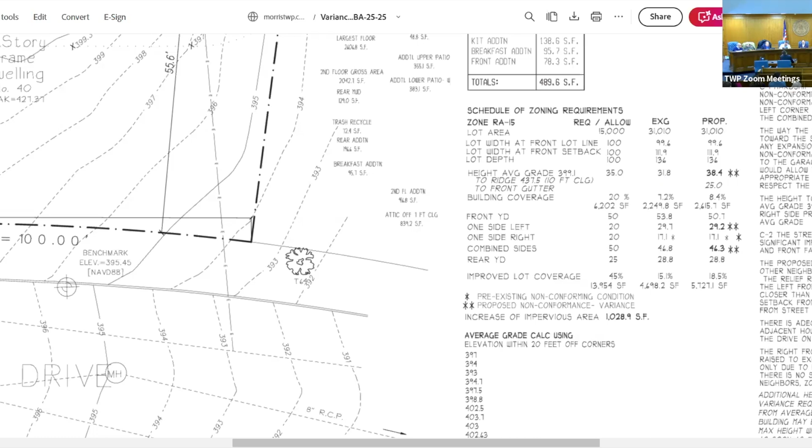I think it was, but then your architectural is calling 32.3 existing ridge from the average grade. Yeah sure, so just looking at it from the street, it's 32 feet, you know what I mean. So the proposed is 38.4, not 37.5 — 38.4.

I'm looking at, I believe, a 6.1 foot increase in height from the 31 — from what's current to what would be the proposal. I don't want to speak for his architectural, but...

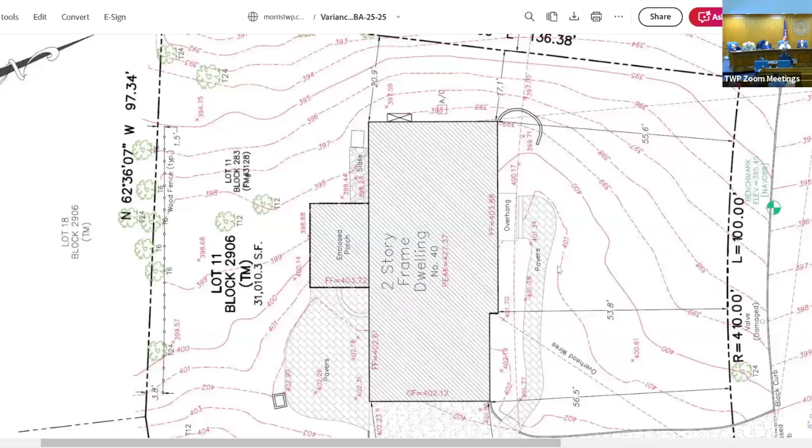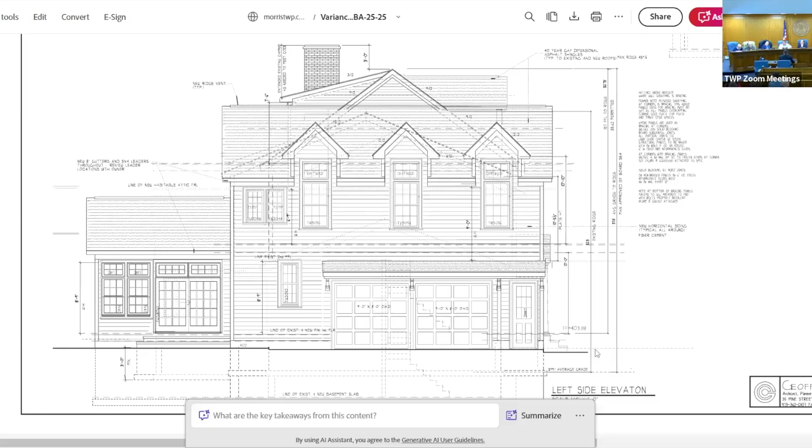From A5, the left side elevation — is this the one you want to see? Yeah, so you're on the right side, above the left side elevation, straight up. You have your average grade at 399.1, which is matching your cover sheet. Average grade elevation, and then you're pulling up from that to 32.3 existing roof ridge. It's that first dimension right there. Yes, this is 32.3, instead of 31.8, which is what we were looking at on the other sheet.

So architecturally we'll go off 32.3, compared to — you have either listing 37.5 or max approved 38.4 on the next dimension over.

So we're asking for approval at 38.4, but for practical reasons discussed earlier, we're probably going to build a little lower to play it safe and have a margin of error. The dimension calls for 37.5 on one side of that line - 37.5 average grade to ridge - and below it, max approved by board 38.4. So that's what we're trying to get to: which of those two numbers is the height to compare to the 32.3 to determine the height increase of the structure, architecturally.

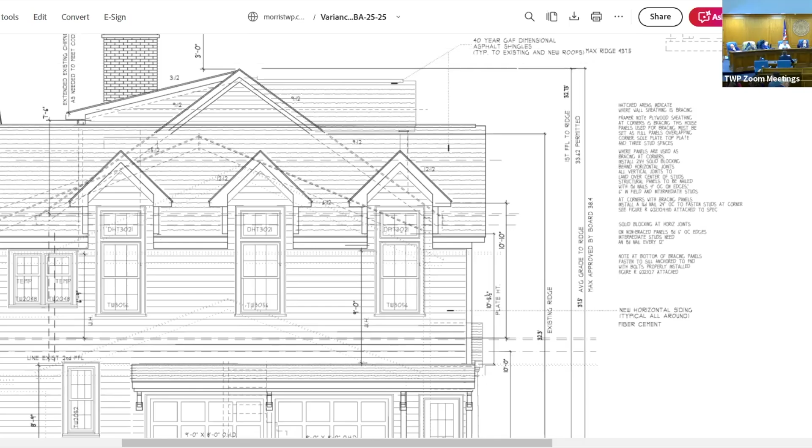Maybe you could just approve it at some point higher than 37.5 just to leave a little leeway there. Well, to demonstrate the height variance, you're going to have to know so that they can quantify the mitigation that they would consider in any form of approval.

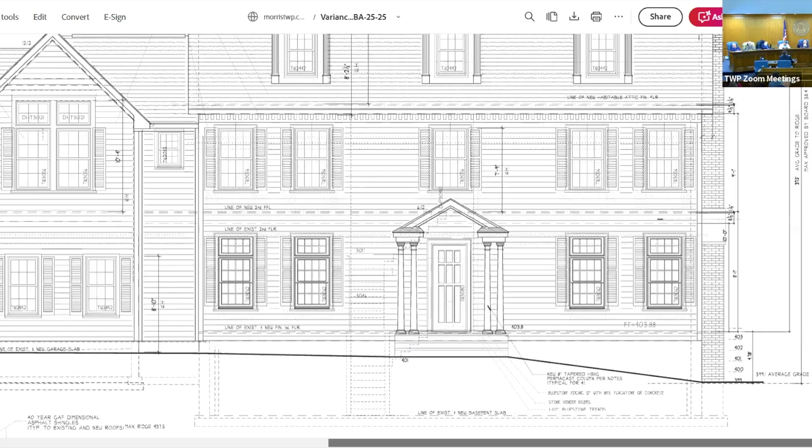What's probably most important to this discussion of the variance on the height is whether it's a C or a D - but we're a C right now. We'll agree that we're a C, that's the way it's been noticed, that's the way it's been presented. Is the difference in height from the existing structure to the new ridge height.

So it's either 31.8 or 32.3 as the existing, based on the two plan references, and then to this 37.5 or 38.4. So if we take the 38.4 - well, 37.5 - so it's either 5.2 feet or 6 point. Okay, I'm sorry that there's a little discrepancy there.

I just spoke to my client, and we're agreeable to the 37.5 height, and we can amend the application accordingly, and we'll make it work. We'll just drop the pitch and make it work somehow.

So you would make the adjustment based upon changing the pitch of the roof, not the height of the floors? Yeah, we'll just drop the pitch a little bit if we have to. We'll make sure that we adhere to that maximum height.

But can you speak to - and I think this was a question Mr. Oler started this conversation with - the justification for the height of each of the floors? The 10 on the first floor, the 9 on the second floor, and the 7, because that's adding to the overall height of the building, which causes that pitch. So can you speak to why those floors have to be that height? I understand the applicant's wish for a more spacious interior, I get that. But does it have to be so spacious that it really pushes the height of the building up over the code?

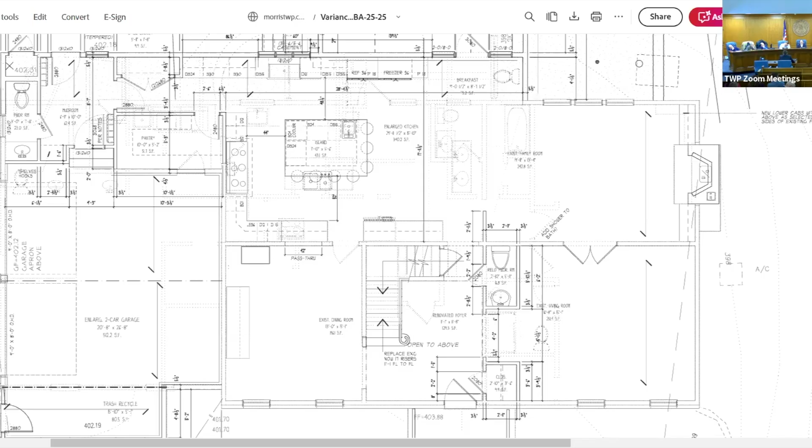In this case, the owner really has been building, he's been out looking at other houses, and he has a daughter who's been looking at other houses, and they walk through a lot of these newer houses which have 10-foot ceilings and 9-foot ceilings, and they just realized how nice it felt and how it would be ideal if they could do it. If the board is having a problem with it, we could talk about it and see if there's something we could do. We probably could, but...

If we can justify it basically because of the hardship of the topography, which is an accepted hardship in the municipal land use law—it's about a 20% grade, I think, on that one section of the street. And I do have another exhibit that I can show for that. I have to just get into the website and look for it.

I'm just going to advise that the consideration for hardship for steep slope be very narrowly banded in a C1 argument, as it relates to the nature of the existing land. Typically that would be something you might address towards steep slope variances as opposed to a height variance to the home, where you're inflicting that yourself by putting the new foundation into those locations. So I think you're going to want to use a C2 variance proof on the height rather than a C1 hardship to demonstrate your proofs on record.

Yeah, and I was going to say that before. I don't see a C1 reason here, honestly. I think the only shot you have is a C2, and I'm really hard pressed to understand what's the public benefit to you exceeding the height.

I do have some C2 proofs in my letter that I attached to the application, and I'll go through that and see if that helps. Because I really think the streetscape will be improved with the slenderness and the proportion of the windows and the height. I think it'll look better than it does today.

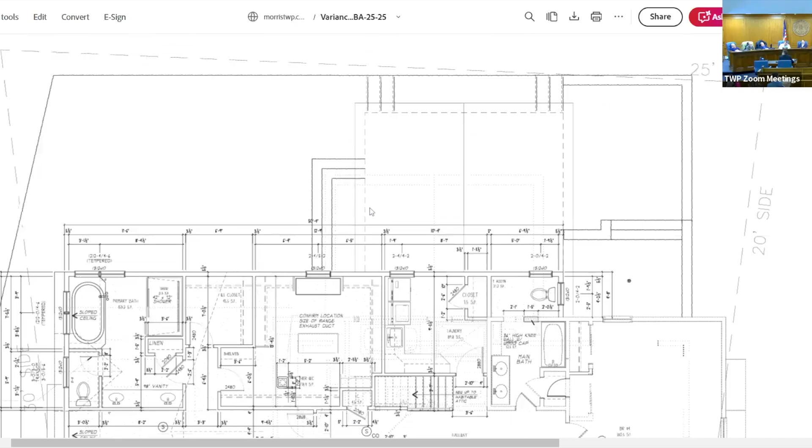You also indicated the basement ceiling was going to be raised a foot as well. Is that correct? No, right now what I was saying is the rear addition steps down. The new slab in that rear addition basement will step down from the existing basement, so it'll be taller there. Just that back section, just that back space.

I'm going to take a second and try to log on. I don't normally use this computer, so I'd have to see if I have the additional visual documentation.

So we've agreed that the 38.4 on the plan is not accurate. The 38.4 is, I think, the height as defined in our code, from the average grade to the top of the roof. I think the 37.5 is the architectural height, essentially. So ideally, if we could ask for approval at 37.4, dropping it a foot, that would give us some leeway, because I'm not sure about that 37.5.

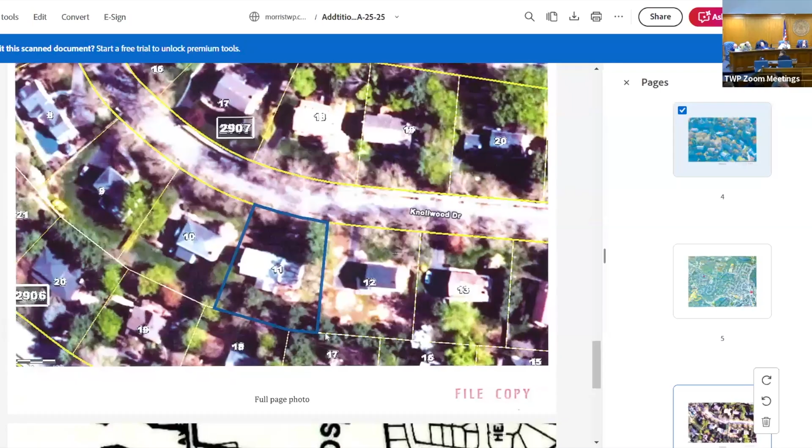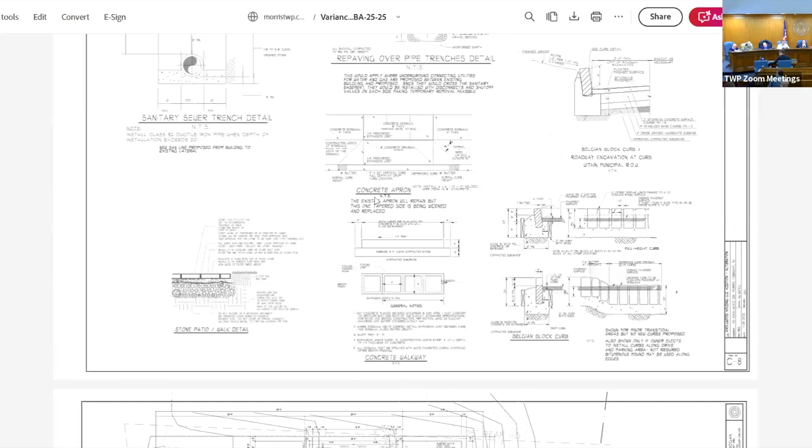So basically it was a neighborhood topographic study, which just showed how this hillside continues way up in that direction and continues down in this direction. There's an existing topographic change of over 10 feet from one side of the site to the other, which drops the average grade plane down and forces all the other dimensions down with it. But it's kind of an abstract thing, because from the street, you don't see that average grade like that.

And I realized that there are other ways to justify variances, which I'll get into -- I'm about ready to go into that part of it, and I'll just summarize the planning end of this, unless there's anything you want to stop and talk about on the architectural end before I do that.

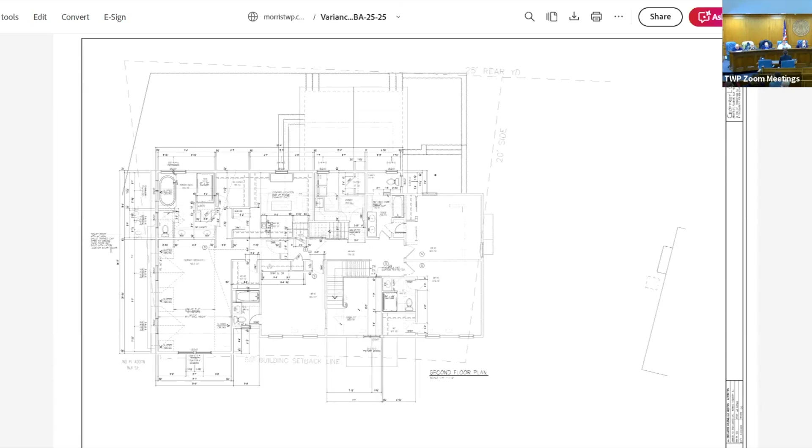I could use a little water. You mind if I just want to get a little -- we can drink, take five? Take 5 minutes, a 5-minute break?

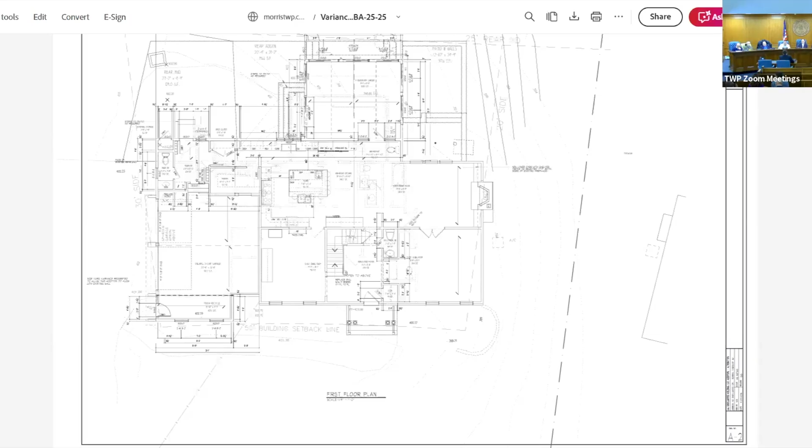So some of the testimony we heard in discussion of the plans had various discrepancies on some of the heights architecturally, how it translated to the bulk standards, including the lot area from the survey that they trusted, which was clearly a typo. So it would be my recommendation that we clean those items up in revisions in your submission, so that we can firm up those numbers specifically to the variances and specifically the height of the structure, so that supplemental architectural testimony can be provided to clean up the revised plan sets next time, and then we get into planning testimony on the revised plan only.

As opposed to starting planning testimony on what we now know has certain discrepancies in it. So, to take out the gray area from the planning testimony and keep the planning testimony preserved in the record after a revision, I would also say we could hear the public after we go through our questions on the current testimony, so that we can summarize tonight with the conclusion on the testimony that's on record, and take the balance of that architectural discussion here.

Sounds like a planned, logical approach. So for the purposes, we'll conclude the architectural piece tonight and then move on to the planning.

Yes, so then essentially an architectural supplement next time to clarify the revisions to the plan that clear up all these discrepancies. And then I would recommend to them that the proposal in that revision go from architectural heights of an existing first floor elevation of the home.

And then you can show the existing average grade elevation calculated and the proposed average grade elevation calculated, because the footprint changes. So the board and the public will understand the extent that number changes that works against the height calculation, and then understand the portion that is purely architectural to the elevation change in the height architecturally going up - how much from the point in space, which is the top of the house now.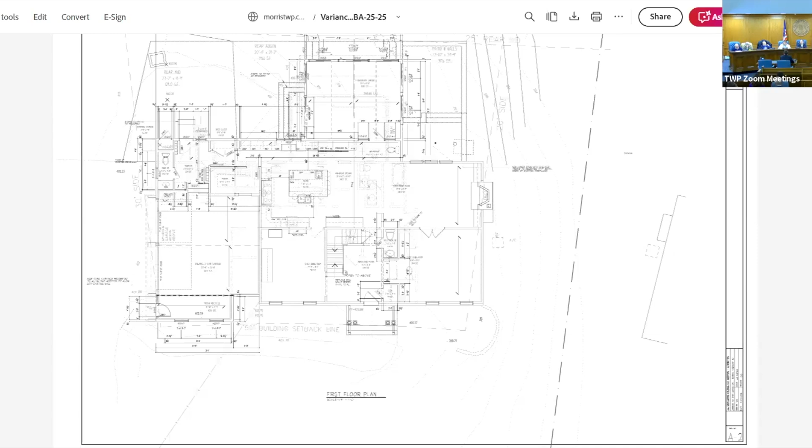Exactly, vertical distance to the proposed top. So, I mean, let's assume the datums are the same. Yes. What is that vertical distance? I think everybody wants to know that.

So I think it'd be to the benefit of the record if that's all clearly revised and represented, so that we're not discussing it twice and we don't have anything misconstrued now in this testimony before the next testimony. Mr. Gogan? I agree with that, and I think it's the right approach. Thank you. All right, any other comments as you conclude your architectural testimony?

No, I think basically, going back to the site plan, I don't hear too much concern about the side yards. They are pretty much pre-existing, where that front bump out of the garage is reducing that just half a foot, but it won't be that perceptible from the street. It's essentially, you've got plenty of space there because the neighbor's driveway is also on that same side, so it's quite a bit of space between the buildings.

So I think the real issue here is the height, and we should just amend the application and nail down those numbers, correct the surveyor's lot area, and recalculate all the coverages and make sure we're okay. But for tonight, before we start any questions about the testimony tonight, right? You want to do that, get that finished?

Correct. We'd like to get the board questions, and then just the public. We are agreeable to lowering the height on the first floor one foot.

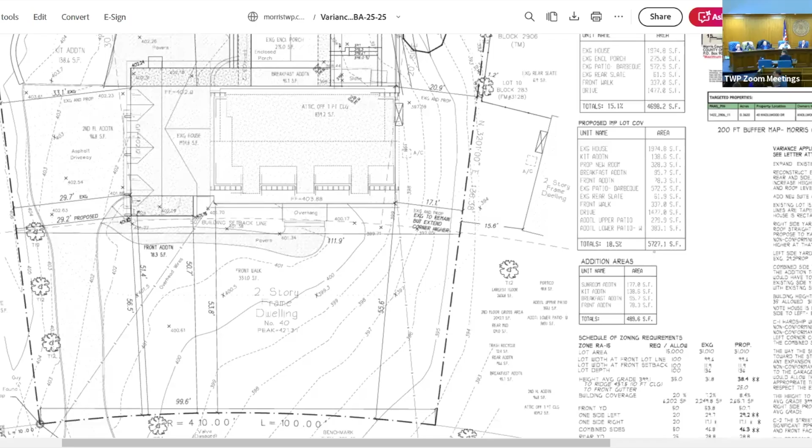Time at the end is probably next set. Correct. Jason Churcha again, 31 Knollwood. Just a point of clarification on how this is going to work. Are the revised plans going to be made available like 10 days in advance? They have to be submitted at least 10 days prior to the next hearing date. I don't know what that date is yet. We'll figure it out before we leave.

And just to be clear, we're just asking questions now about the architecturals and not any of the planning components. Yeah, we haven't really gotten to the planning components yet. He'll testify to all that next time. I'm only going to ask questions about the architectural then. I'm going to reserve whatever, and understanding that with respect to the architectural plan, it's going to change in terms of the height, right? Yeah, okay.

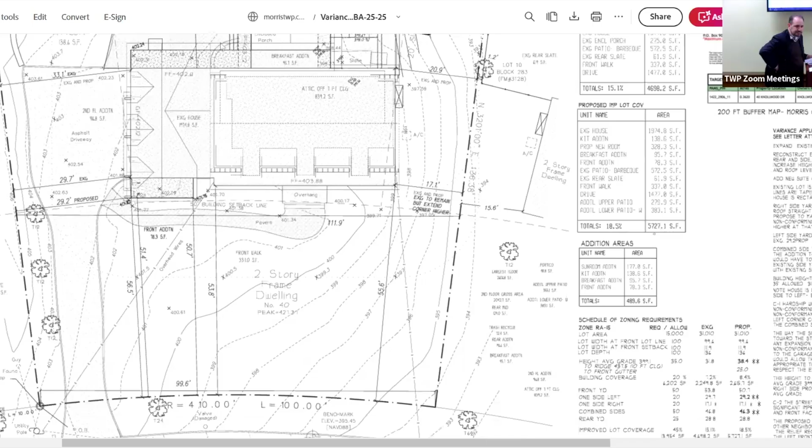Can you clarify what the square footage of the proposed home is going to be? Let me see if I have that handy here. 2615. No, I just, off the top of my head, I don't want to just throw a number out. I have the footage, I have the footprint, the proposed ground floor we have proposed is... I'm just asking about the habitable square footage. What is the total habitable square footage of the home? The proposed home, so the ground floor, including the garage, is 2615.

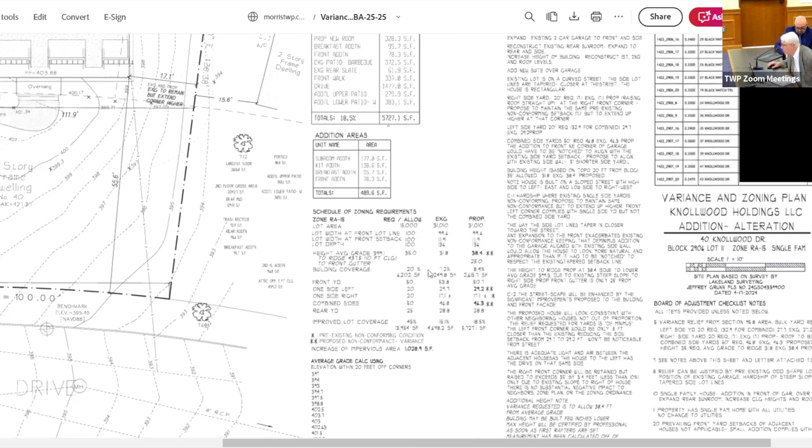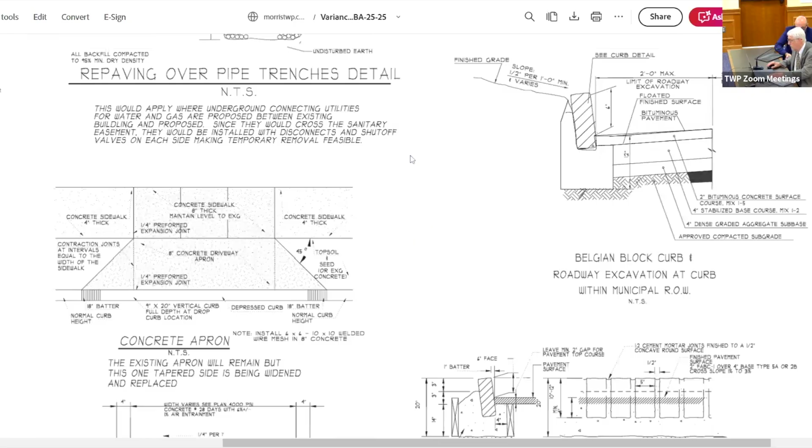That's one floor. That's two floors, times two. Let me just see if I have the second floor handy here. On the cover sheet, I don't think it's here. But let me check the second floor plan and see if I have it. I'd have to calculate, but the second floor addition is 968... I think 916.8, I'm sorry, let me just make sure I'm reading it correctly. 916.8. And I just have to run the numbers, but all in all, the second floor is following the first floor walls all the way around except for the sunroom. So it's probably very close to that ground floor area, minus the sunroom area, which I believe I have on the cover sheet.

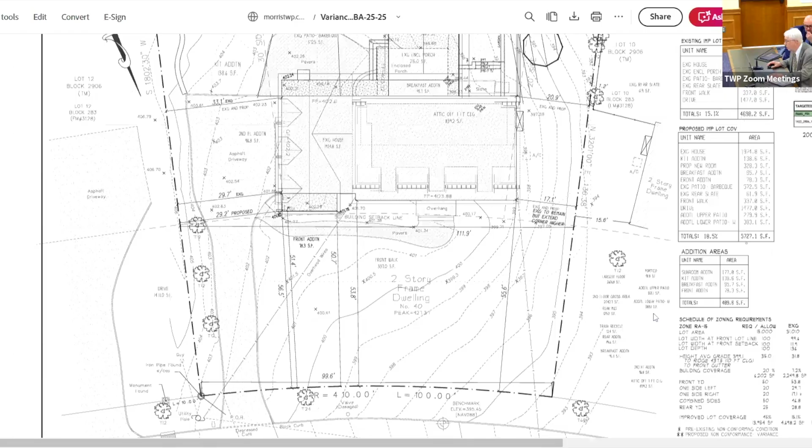Are you including the habitable attic? No, I didn't count that in yet, but the habitable attic, I'll just go back up here a second, sorry. Yeah, so we have the existing sunroom, 275, and the addition of the sunroom is 398.8. But then there's a portion, I'd have to run the numbers, but essentially, let's just say it's roughly the same as the first floor minus, the second floor is the same as the first minus 275, 398, and that's it, 275 and 398, do you have that?

So it's 4,600, the first floor plus the attic, times 2, minus 275, minus 398, yeah. Plus the attic, so that brings it to about 4,500 square feet. Does that include the attic? No, that's without the attic. So how many square feet is the attic, the habitable attic? I believe it's around 830.

So we're talking a number, it's safe to say the house, the proposed home, is greater than 5,000 square feet of habitable space. Yes, yes. Including the garage? Including the garage, but does that include the basement? No.

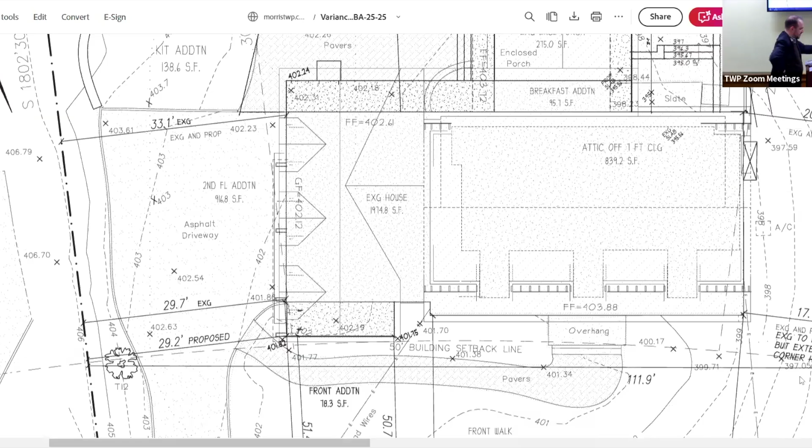You have a kitchen in the basement though, but the basement's not habitable? Is that why you're not including the basement? Let me ask that again. You're not including the basement because it's not habitable under the code, is that right? No, I mean it is habitable, it's not a sleeping area, but theoretically somebody could. We have a walkout now for egress, but the only reason for the kitchen shown down there is it's more like a summer kitchen for baking. It's just for his hobby of sourdough bread making, and it's not a second kitchen like for an apartment or anything like that. Well, it has an oven, or double oven, right? It has an oven and a sink and refrigerator. And some storage space as well? Yes. Does it have a stove? You would call it a stove range. Okay. Is there anything else in the basement kitchen?

It's just a little too much murmuring going on. Please, can't hear you.

Is there anything in the basement kitchen proposed for this house that is missing from what you would commonly refer to as a kitchen in any of our homes? For all intents and purposes, it's going to have cabinets, counters, a range, refrigerator, and an oven, so it's similar to another kitchen. But I will note that doing work throughout Morris Township over the years, there are quite a few homes where a second kitchen is not a problem, as long as the owner signs an affidavit saying it's only for his family to use, like if they're visiting, or a mother-daughter situation, or somebody handicapped who has trouble using the stairs.

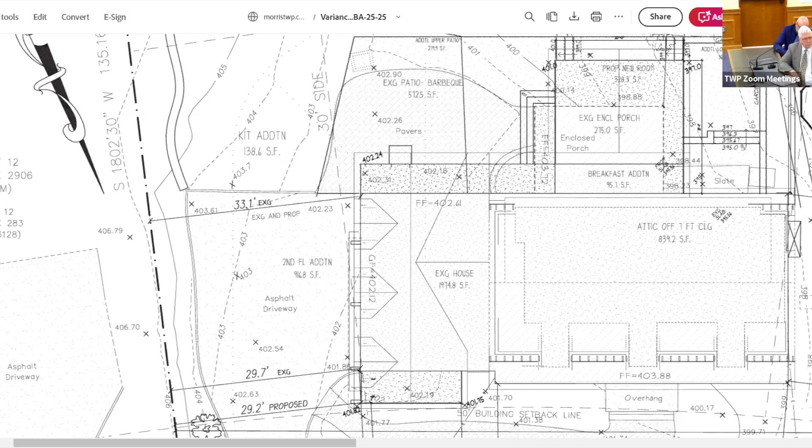Right, but as the homes exist today, again, you don't know if they have habitable attics or not. I have not gone around and surveyed it. Okay. Do you know what the square footage, the habitable square footage, of the existing home is?

Well, I have the existing footprint shown here. I'd have to do the arithmetic again, but basically without the master suite over the garage and without the back sunroom, that's 22... I don't know offhand, is it about 2,500 square feet? Is that fair?

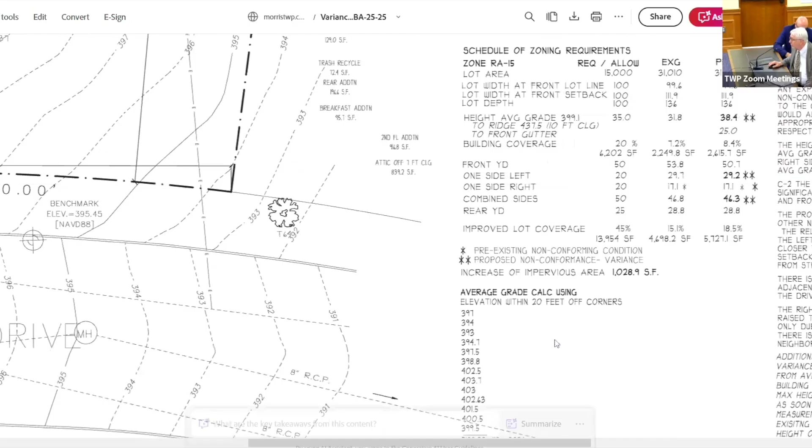Let me see if I have that, if I can give it to you. So the existing house is 1974. It's 2249 with the porch, with the rear addition. And is that the sunroom? So let's say 20, we can round it up, we can round it down to 2,200 square feet. We can round it however you want.

Is the existing square footage consistent with the neighborhood? It is consistent, I would say. And earlier you testified that the proposed habitable square footage of the home exceeded 5,000 square feet. Is that larger than the homes in the neighborhood?

Well, first of all, you're comparing a first floor footprint, which is different. Well, no, my first question was what was the habitable square footage of the house? And we weren't sure, but we said it was safe to say it was greater than 5,000 square feet. You remember that? Yes. Okay. So my question now is, taking 5,000 square feet as the minimum, is that minimum size greater than the general size of the homes in the neighborhood?

I'll just answer this way. If you take the roughly 2,250 existing footprint of the house, which includes the garage, and you apply that to other houses around the neighborhood where their garage is in the basement and the second floor extends all the way over the garage, so the entire footprint of the house is covered by the second floor, it's very possible that you're close to 5,000 square feet on a lot of those houses.

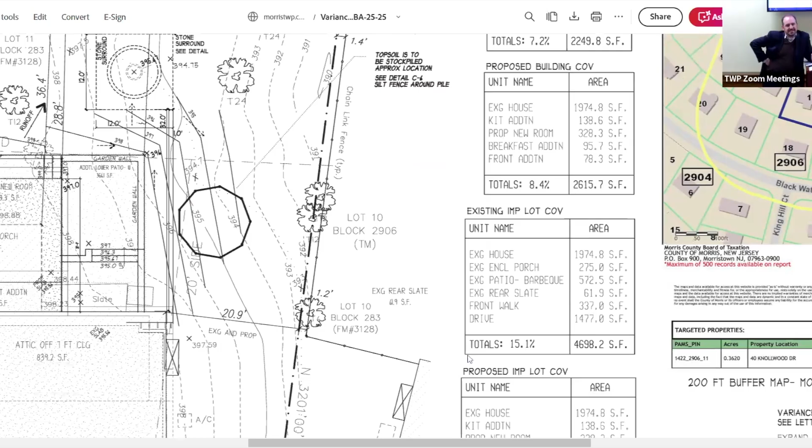Well, how big is this? Please, how big is the garage? It's like maybe 24 by some 20.

So your testimony is that some houses have an additional 500 square feet that this house doesn't have because of the garage? I'm obviously thinking out loud here, from driving around where you do see houses that have the garage under the house, not next to the house, and the entire first floor and second floor are already aligned. So I don't think it's that far a stretch. It just seems logical that if you have a house with a 2,250 square foot footprint, and the garage is not next to the first floor but under it, with two stories above, it's not that impossible to imagine.

Maybe it's not 5,000, maybe it's 45. Photo array? Yeah, we're not going there. No, we're not doing that right now.

That's for later, I would like an opportunity to do that. Absolutely, you will have that opportunity, but this is just questions on his testimony. We're already past... I'd like time to show why that testimony is wrong.

So can we do a photo array when we come back? He's going to give us new architectural plans. We may do that first, so that you can then question on the new architectural plan, right? We'll then conclude all the architectural testimony, and we'll come back to you to continue with your questions.

And then everyone else who has questions will have an opportunity, and then we'll go into the planning testimony. When all of that testimony and all the questions for it are over, then you and everyone else will have an opportunity to offer any kind of testimony you might want to offer. Okay, I would like to be able to do that at the next hearing, so I don't have any other questions. Okay, but I would like to come back to that when the next hearing comes.

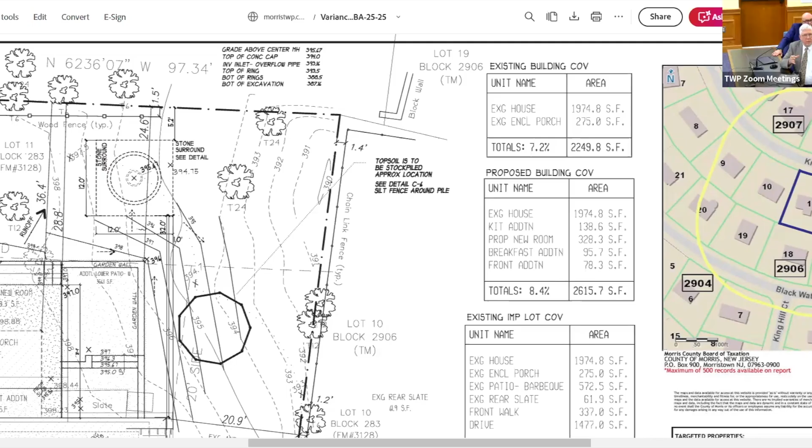You said that testimony is wrong. I think it should be clarified that I did say I don't know. I have not surveyed all of those conditions throughout the neighborhood. I'm just speculating based on the overall comparability of footprints in the neighborhood that it's not that much of a stretch, but I'm just speculating. So the answer to my question then was, is a 5,000 square foot home consistent with the neighborhood? Your answer is you don't know. I don't know 5,000, but I would say if it isn't 5,000, it's not that far.

Right, it could be 45. In the interim, when we come back again, there's a few things they're going to present in addition to the revised plans. I'd suggest that you maybe see if you can get some heights on homes in the neighborhood. I think photographs of other homes that you're going to compare to would be helpful, not just this property, but other properties on the street.

Maybe look at what the property line is, is there a buffer between this, what you're going to be building on, and the house to the right, which is the most impacted home? What's that property line look like? Are you going to offer a buffer if there isn't one? And you can verify what the square footage is for this property and average square footages of the homes in the neighborhood, which is information easily accessible through assessor's cards.

Right? Yes, so I can do that analysis, you can have all of that. Right, no problem. And that really goes more to the planning. Fair enough, I don't have any other questions then, with the caveat that I would like to. You will have that chance. Yes, thank you. So what do we got for next date?

Should we, for the public, are we going to? Yeah, we're going to get to the public at the next meeting, I'll be brief.

Again, as I just said, I waited all night, I'll be brief. I know, come on, you can't shut us down. We've been waiting all night, nobody in this room wants you to shut us down any longer. I'll be brief, it's bullets. Is it one question? It's several questions, but they're quick and I won't go back and forth. So what's the next date?

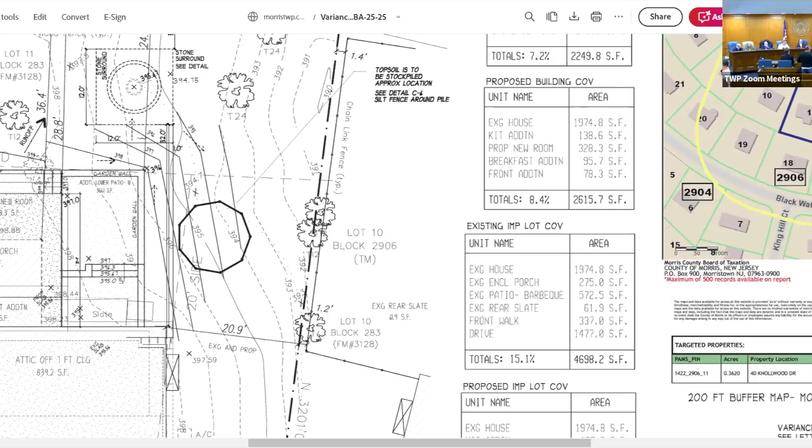Any other matters on the agenda, or Paul, you want to take your seat back? Okay, are there any other matters for the board to discuss? Yes, Mr. Chair, have we confirmed that April 15th hearing for the South Street property? Yes, we have confirmed it. We have sufficient board members, the objectors are available, the applicant's available. Thank you.

Any other board issues or questions? No? Can I have a motion to adjourn? Motion to adjourn. Second? All in favor? Aye.